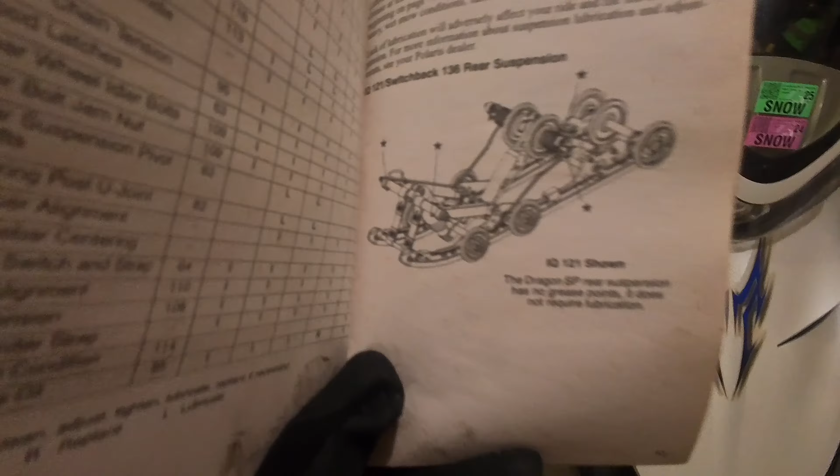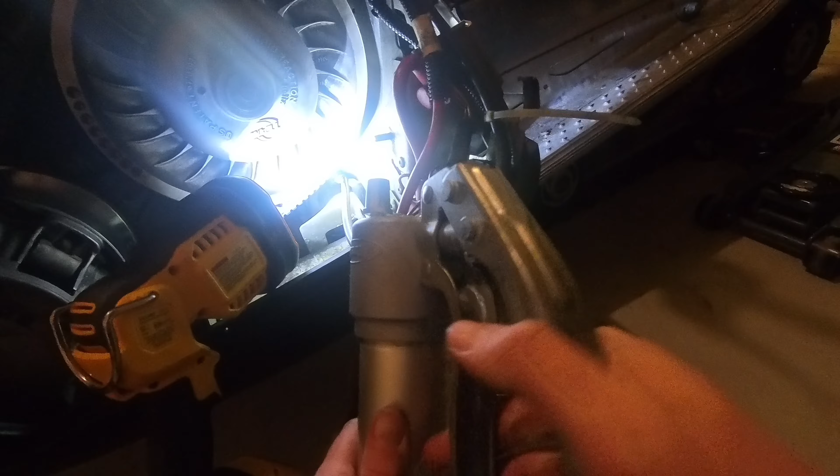Today, I'm going to be going through my maintenance checklist on my snowmobiles before we go out riding.

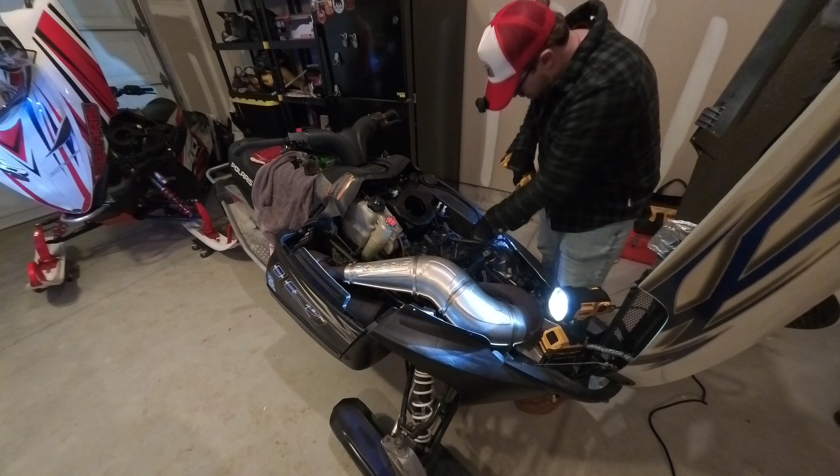I'm working on two Polaris snowmobiles today, a 2007 Polaris IQ LX 600 and a 2009 Polaris Dragon SP 600. I'm not a mechanic, just a regular rider getting my sleds ready to ride and learning as I go. As I'm going through the maintenance, I'll be referring to the owner's manual, and I'll put parts of it up on the screen so you can see exactly what I'm following.

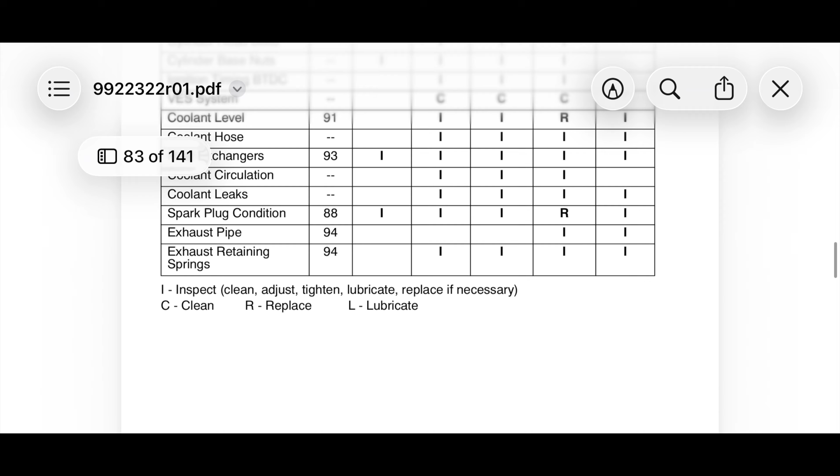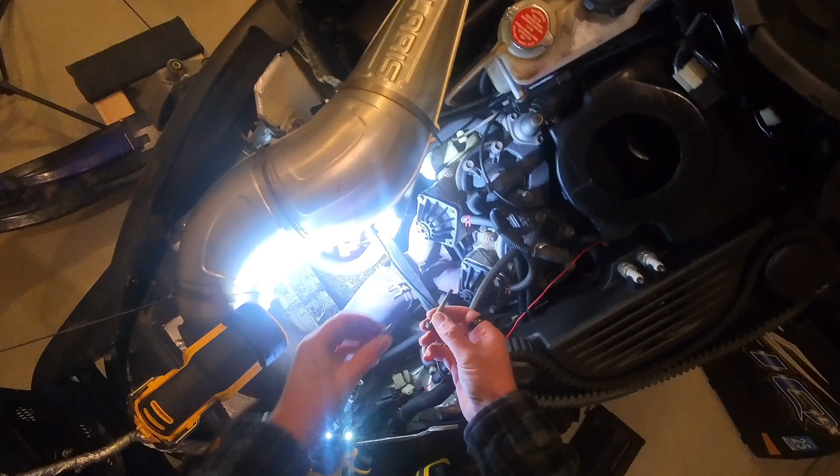We're going to start by pulling the exhaust valves. On these two-stroke sleds, they build up carbon over time, which can lead to loss of power and poor throttle response. You'll need a 10mm socket for the bolts. I made the mistake of pulling all 4 bolts on one valve before realizing the top and bottom bolts just hold the cover, and the 2 side bolts are what actually let the valve come out.

Since I took the cover off, I had to be careful not to drop the spring when pulling the valve off. Also, as you slide the exhaust valve out, a little oil can come with it, so definitely have a rag handy just in case. Don't forget to disconnect the vacuum line off the port. That's if you still have one. On my other sled, the previous owner already deleted the line and capped the port.

From what I've read, the main reason people do this isn't for big power gains. It's more about simplifying the system and making the exhaust valve behavior more consistent. What are your thoughts? Is it worth it to delete the vacuum line and cap the port?

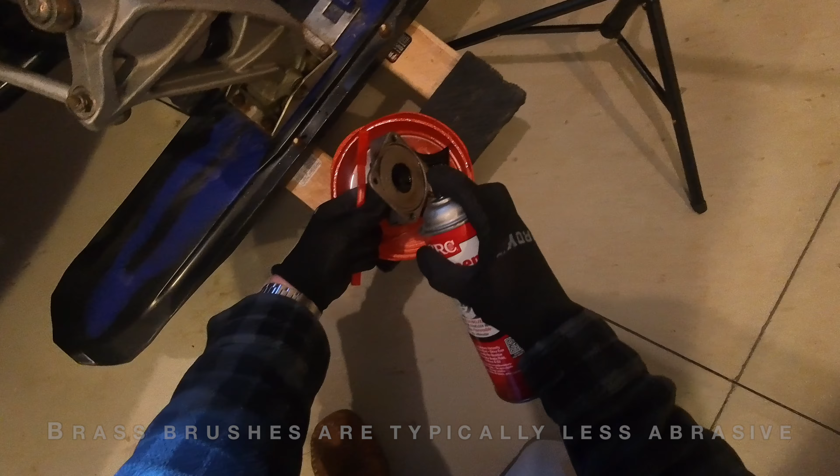Alright, let's start pulling the exhaust valve apart so we can clean it up. You'll want to inspect the rubber boot for any cracks. You don't want any air leaks, so replace it if it looks worn or damaged. I ended up hitting the metal parts with some brake cleaner and gave them a scrub with a brass brush to remove the carbon buildup. I've also heard that carburetor cleaner works too, but I've never tried that myself.

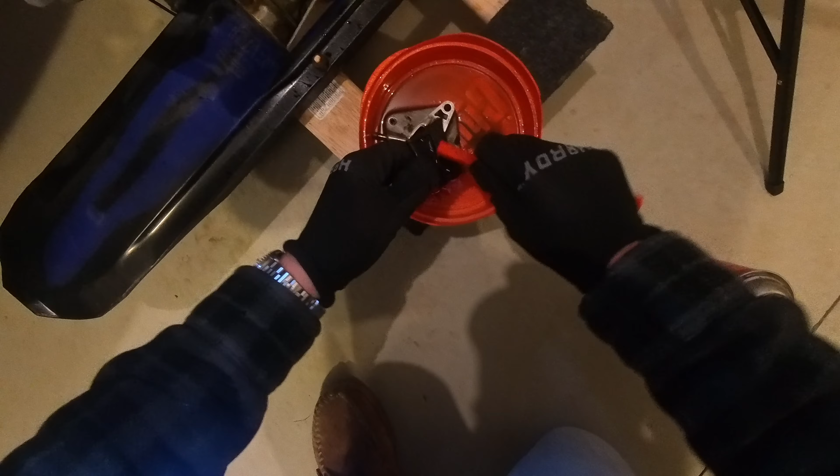The brass brush and brake cleaner didn't remove all the carbon, so I let the metal parts soak in a container of old gasoline for a few hours. After that, another scrub helped break down the remaining carbon. When dealing with any type of flammable liquids or chemicals in general, always take the proper precautions and ensure your safety comes first.

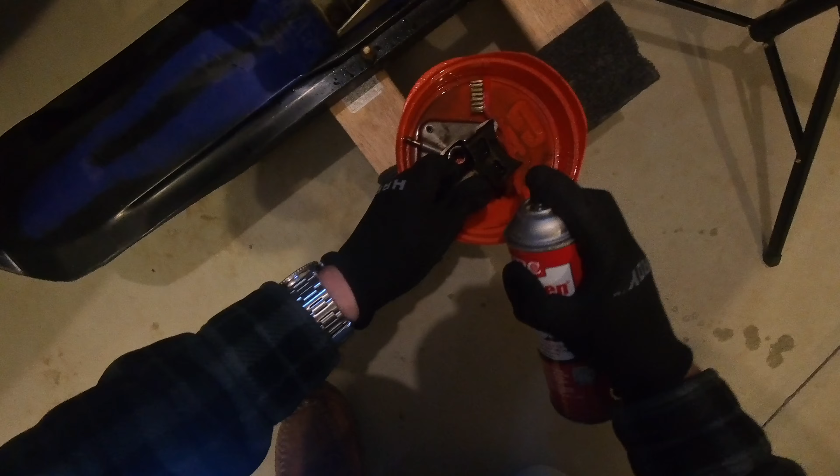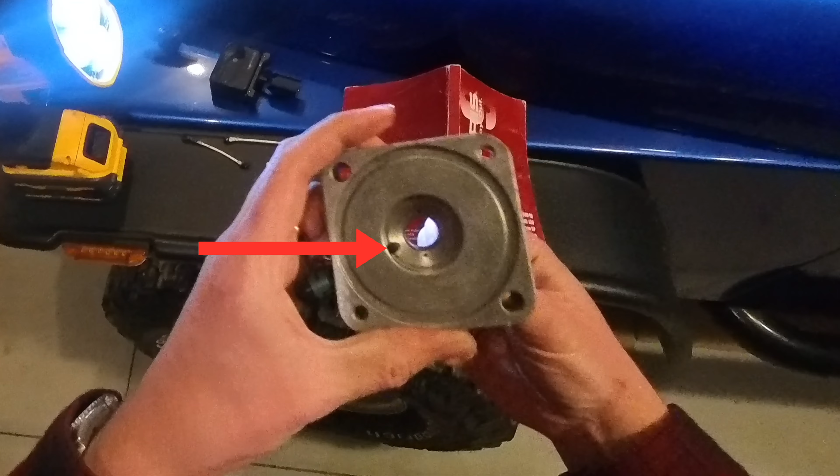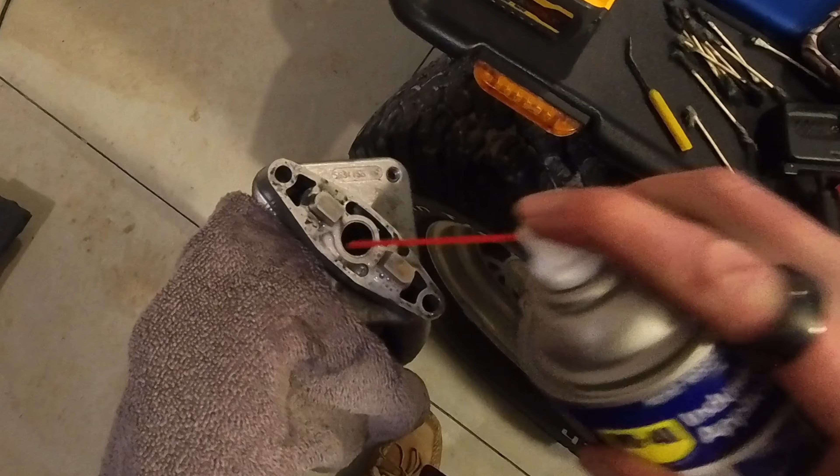Before putting the exhaust valves back together, make sure these 3 ports are cleaned out. One feeds the vacuum line, and the 2 smaller internal ports help the valve operate correctly. These tend to build up a lot of carbon. I had some WD-40 on hand, so I sprayed a small amount into all 3 ports and used a Q-tip and pick where I could to remove the carbon.

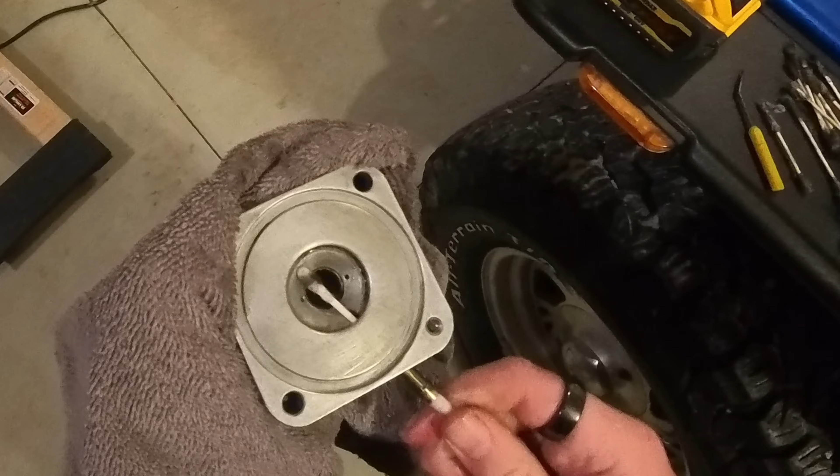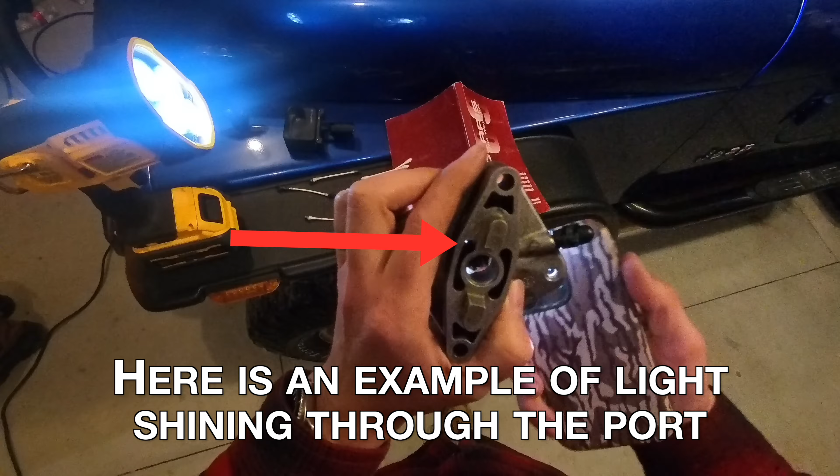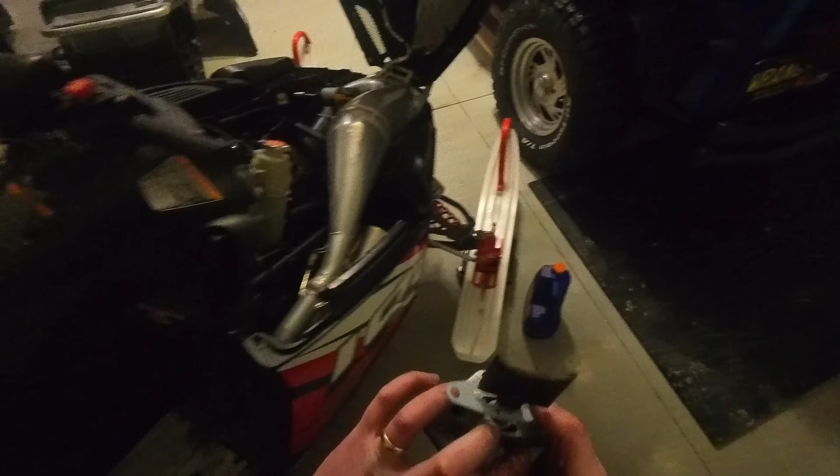I repeated this until a flashlight could shine through the ports, meaning they were no longer blocked. I used an air compressor to blow out any excess WD-40 and made sure everything was cleaned off properly before putting them back in the sled. I've got the valves reassembled and ready to go back in the sled. But first, I'm going to replace the exhaust valve gasket. My local dealer only had 2 in stock, and I needed another 2 before my trip.

Luckily, my uncle had a couple of spare gaskets that fit my sled. That's one of the perks of owning similar sleds to the people that you ride with. So here's a big shout out to my Uncle Dean for saving my trip.

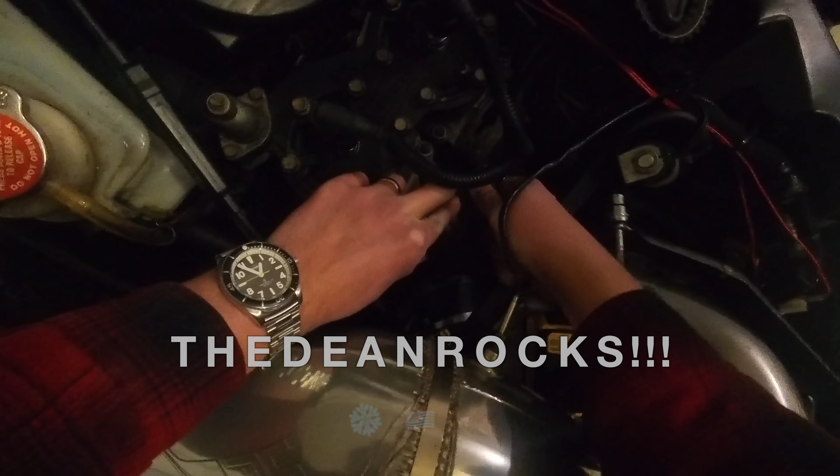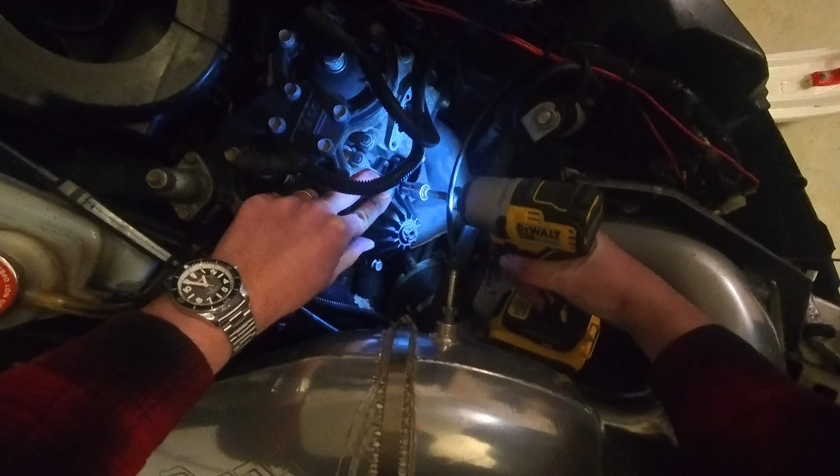Up next, I'm going to remove and inspect my spark plugs. The manual recommends changing them every 2,000 to 2,500 miles, but I like to change them at the start of the season. If the spark plugs are still in good condition, I'll clean them and save them as spares. Both of my sleds use the same spark plugs, so buying them in bulk can save a bit of money.

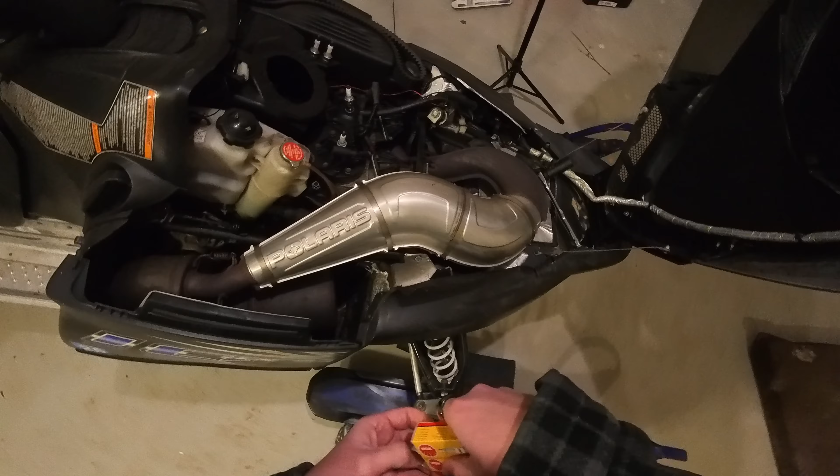When installing new plugs, make sure to gap them correctly for your snowmobile and torque them to the specs in your manual. I'll show parts of the manual on screen for a brief second, so feel free to pause and check it out.

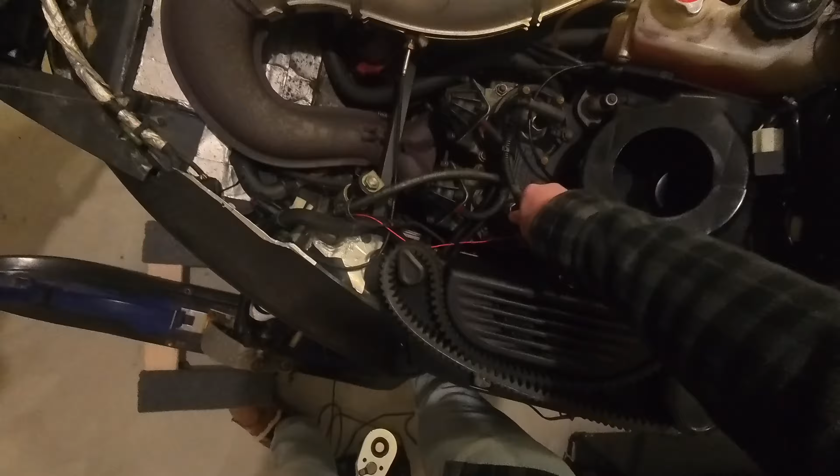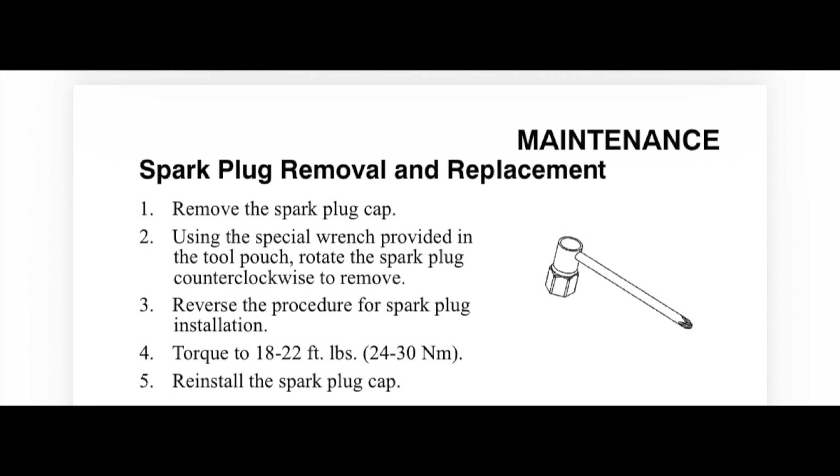Next up, I'm checking the cooling system. You want to make sure the coolant level is between the minimum and maximum marks on the coolant bottle, and always check this when the engine is cold. Running low on coolant can lead to overheating and some pretty serious engine damage.

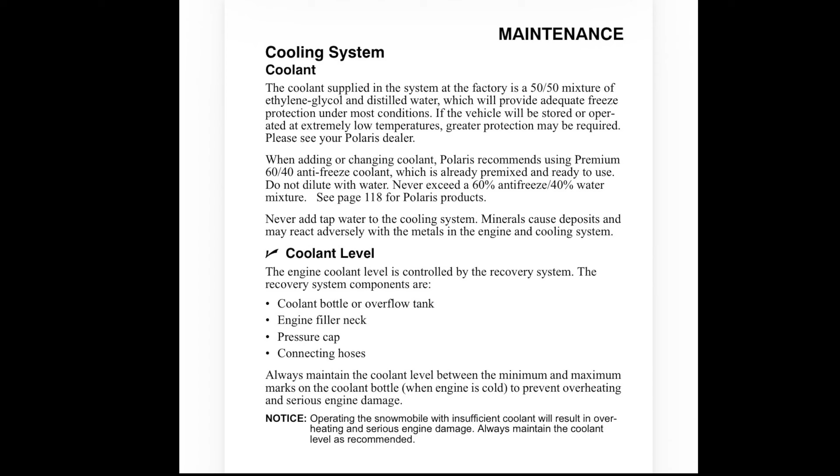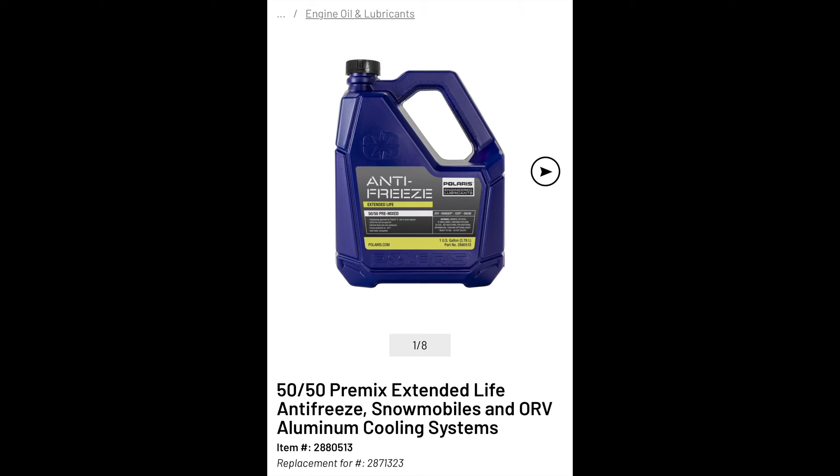I went to order the coolant Polaris recommends in the owner's manual, and it turns out that part number has been superseded by a newer one. The updated Polaris coolant is item number 2880513, so that's what I'm using. Next, I'm topping off with VES full synthetic 2-cycle oil, which is what Polaris recommends for these sleds.

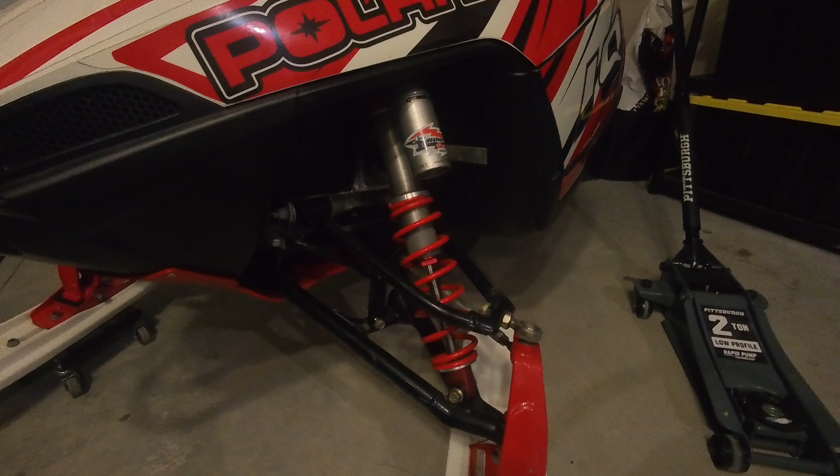Now let's get into some other important inspections. I've had shocks fail while the sleds were sitting over the off-season, so it's always important to check them out. The Walker Evans clicker shocks on my Dragon failed last year, and I had them rebuilt by a local shop.

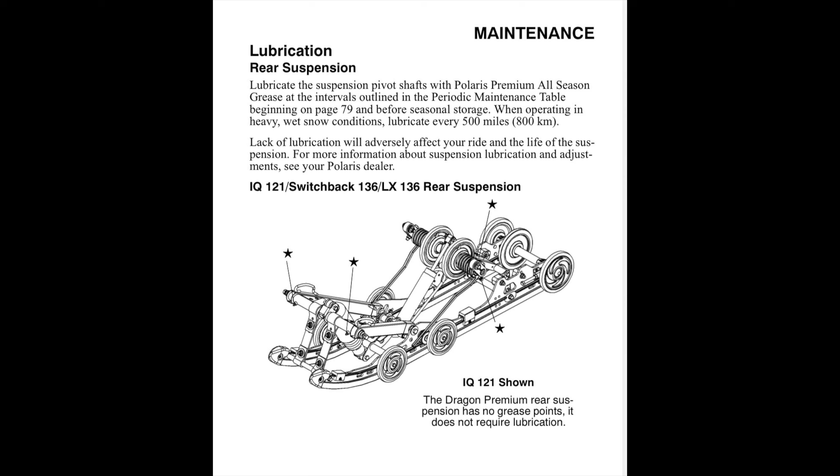While we're on the topic of suspension, make sure you grease the suspension pivot shafts. The Polaris IQ LX has 4 grease Zerk fittings on the rear suspension. The Dragon rear suspension, on the other hand, has no grease points and does not require lubrication.

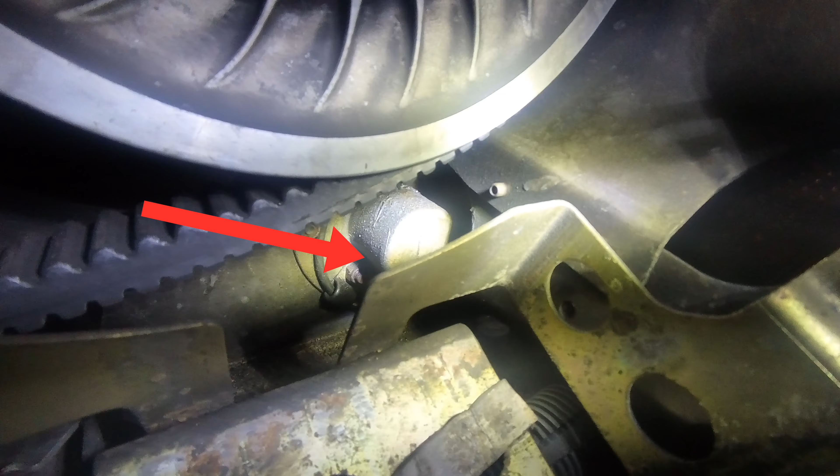Let's lubricate the drive shaft bearing. So we'll want to inject grease into the fitting on the speedometer sensor housing until grease purges from the seal on the inside of the tunnel. This usually takes about 2 pumps. Do not exceed 4 pumps, as over-greasing can damage the seal.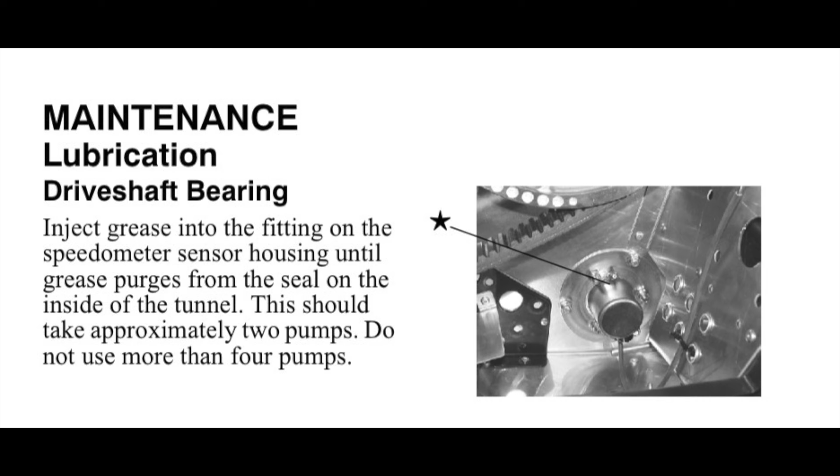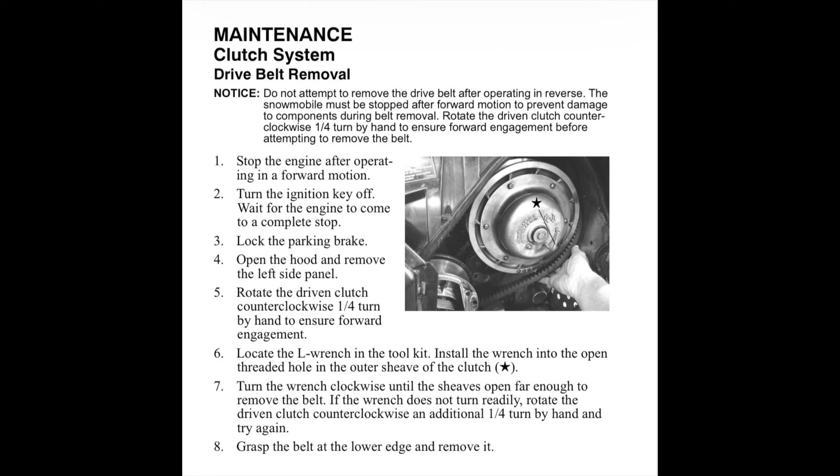It's also important to check the clutch and the drive belt. I'll leave the owner's manual on the screen for a few seconds, so feel free to pause the video and review Polaris' recommendations. It's also a good idea to check out your hyfax to make sure it's not worn out. Mine looks good for now, but I'll keep an eye on them through the season.

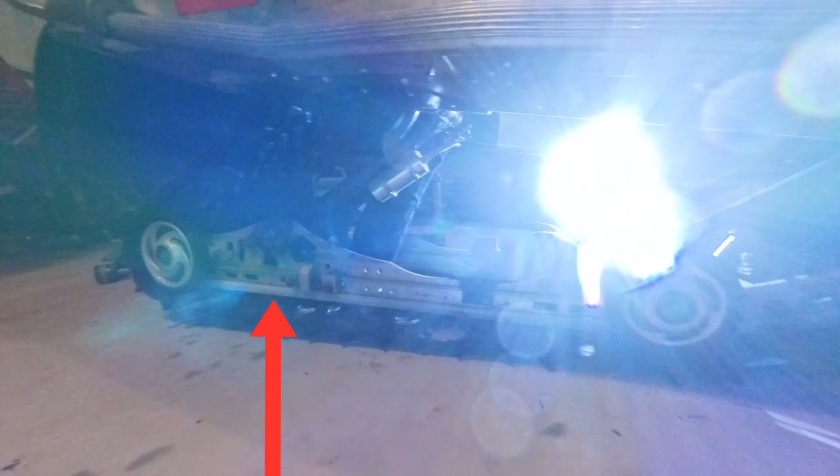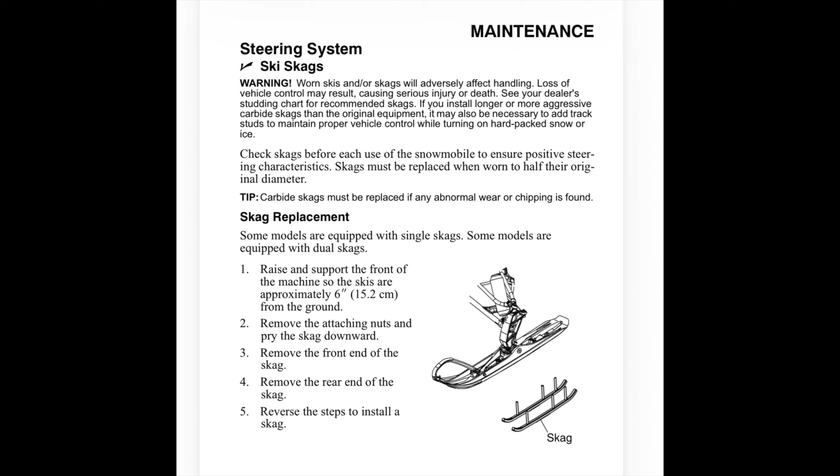Carbides are another key item. If they're worn, you'll notice it's harder to steer, especially when crossing roads or in a parking lot. If your carbides get too worn, they can actually damage your skis. On my Dragon, I've already noticed some wear, so these will probably need to be replaced by next season.

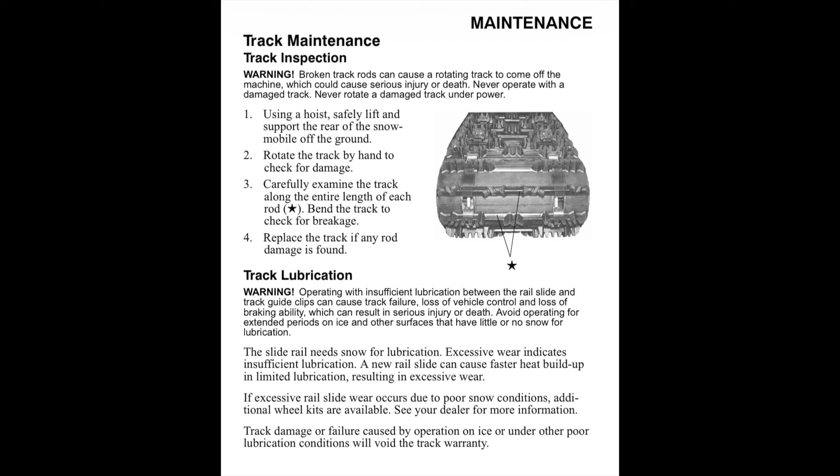I'd also recommend checking your bogie wheels. I've had some go missing or get damaged and had to replace them. Don't forget to check your track for any damage and make sure it's at the proper tension. Your owner's manual is a great resource for other maintenance inspections, but some of the best advice I can give is to take your snowmobile out for a quick ride before a big trip to make sure everything is working properly.